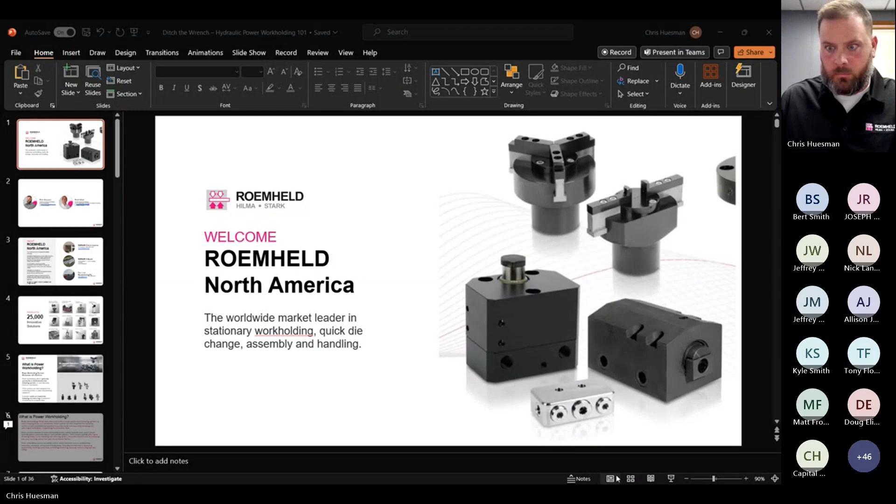With that, we have over 25,000 innovative solutions in our catalog, ranging from hydraulic cylinders, machining vices, zero-point clamping systems, assembly and handling, power units, all your necessary hydraulic components, pneumatic elements, magnetic clamping, die clamping, press-in devices, drive technology, as well as full system solutions.

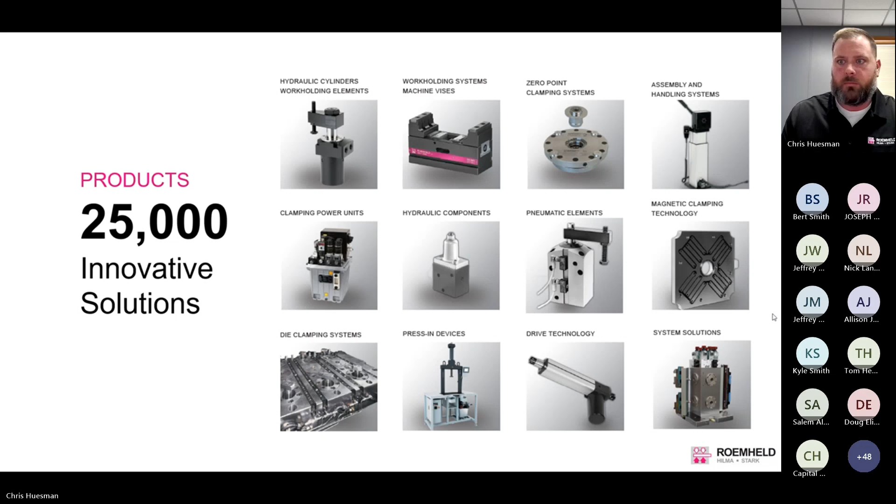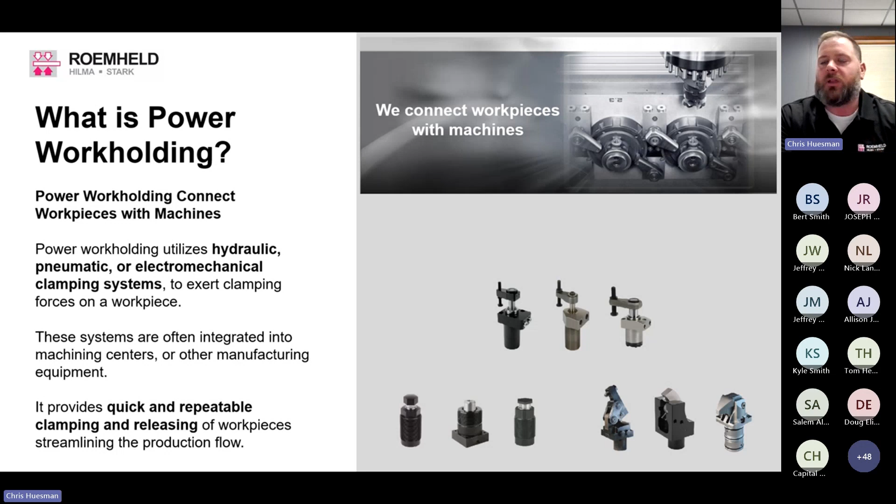So you may be wondering, what is power work holding? Power work holding utilizes hydraulic, pneumatic, or electromechanical clamping systems, typically to hold a part in a machining environment. These systems typically are integrated into a machining center or other manufacturing equipment. It provides quick and repeatable clamping for a robust manufacturing process, from manually loaded all the way up to highly advanced automated solutions. So what are the benefits of power work holding? Increasing productivity, enhanced precision, improved safety, and probably the most significant benefit is the time and cost savings.

So who should use power work holding? Do you want to make more parts with the same resources? Do you want to achieve greater repeatability and part quality? Are you looking to have fewer scrap parts? Are you seeing a shortage of skilled machine operators in your area? Are you looking to improve machine operator safety and ergonomics? If you answered yes to any of these questions, power work holding is something that you should explore.

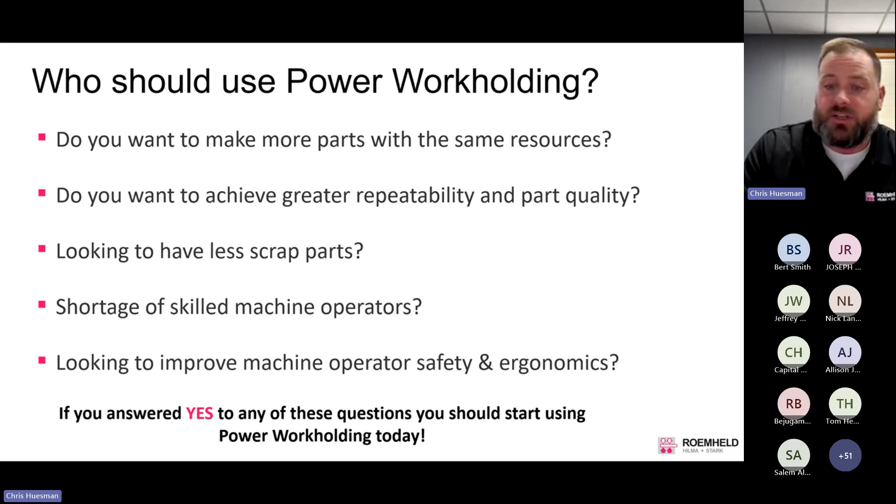So let's look at the first benefit, increasing productivity by ditching the wrench. It's quick and automated clamping and unclamping. This significant reduction in setup and changeover time minimizes idle time, maximizes spindle uptime, as well as assembly time, and allows you to put more parts through a machine, which saves you money. Power work holding systems can operate multiple clamps and other devices in sequence to accomplish a multi-step fixturing task, simplifying the process for the operator.

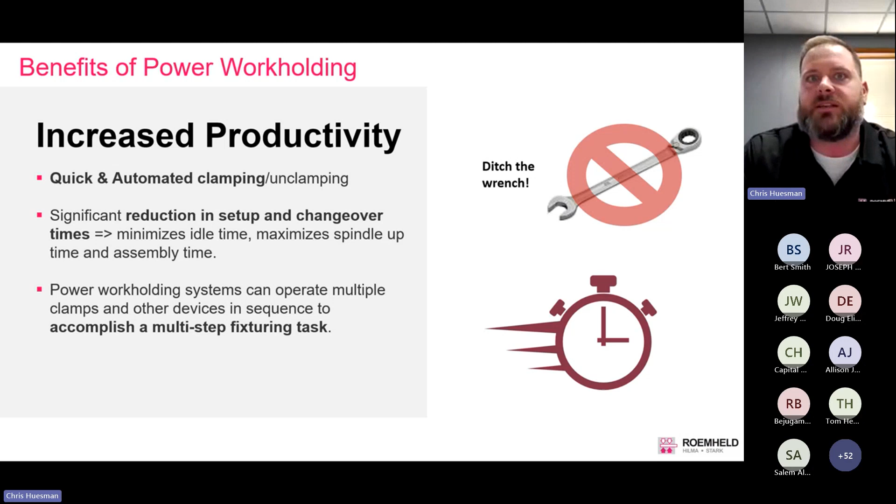Another benefit is enhanced precision. Consistent and repeatable clamping force ensures accurate and precise positioning of the workpiece. This helps maintain tight tolerances, resulting in higher quality finished products.

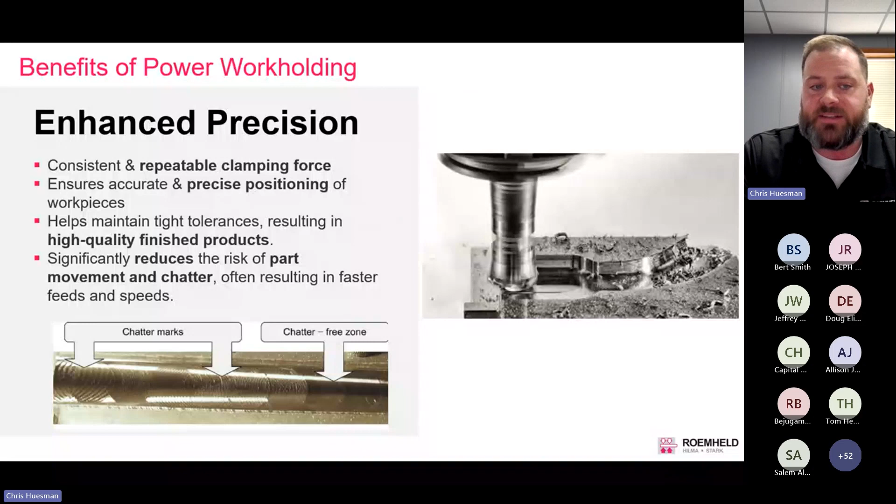Significantly reduces the risk of part movement or chatter, which can also result in the ability to push your tools faster. Improves safety: integrated safety features help prevent accidental release of workpieces and reduce the risk of operator injuries through check valves, interlocks, and various sensors. Eliminating manual clamping reduces operator fatigue injuries.

Power work holding also allows for remote control of inaccessible fixturing. So in a situation where you have features that are hard to reach for a standard operator, or a machine where you want the operator to be locked out, power work holding allows you to accomplish all these things remotely. Operator safety.

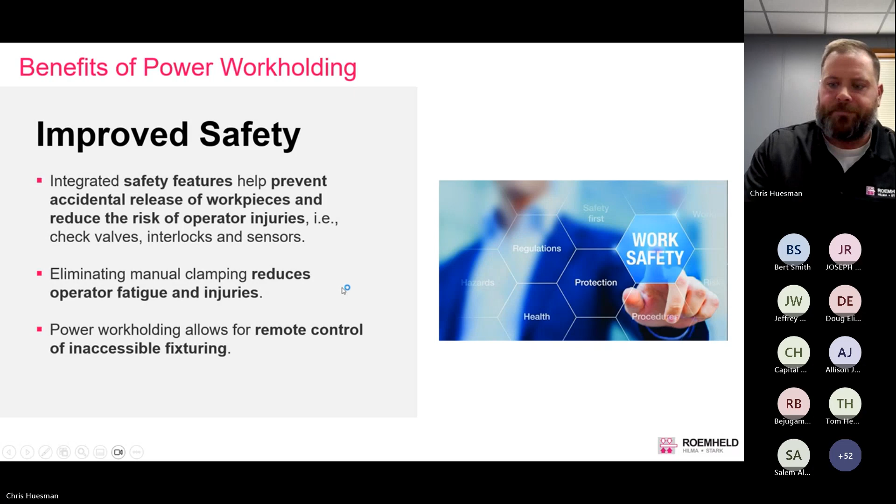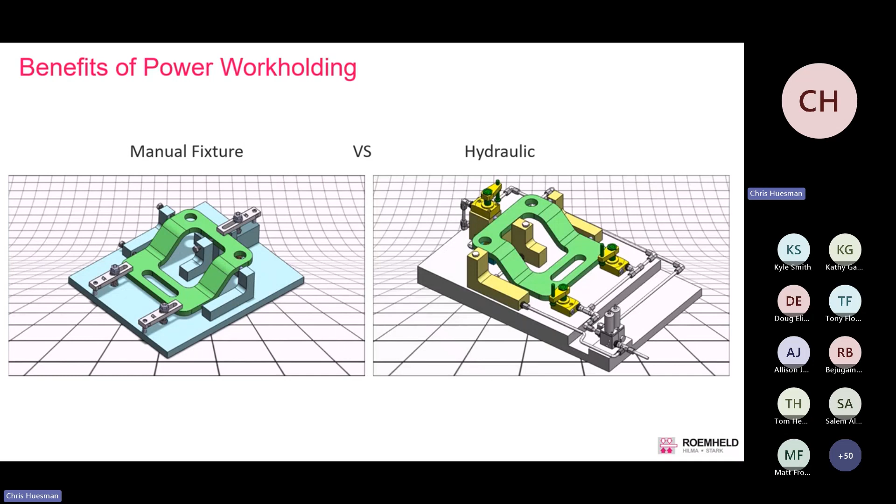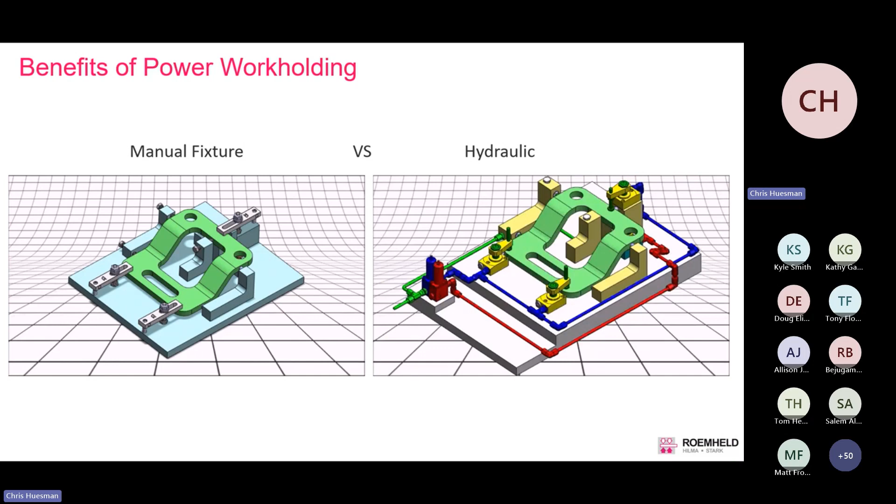Whereas moving into a hydraulic fixture, since everything is controlled from one point through sequence valves, we can automatically extend part crowding, clamping the part, and extending work supports in the proper sequence in a very short period of time. So that leads us to our time and cost savings. Reducing the dependency on manual labor saves significant time and reduces labor costs. The automation and quick setup capabilities ensure faster production cycles, resulting in higher throughput. So every minute that you save in clamping that part is a minute that you can be machining.

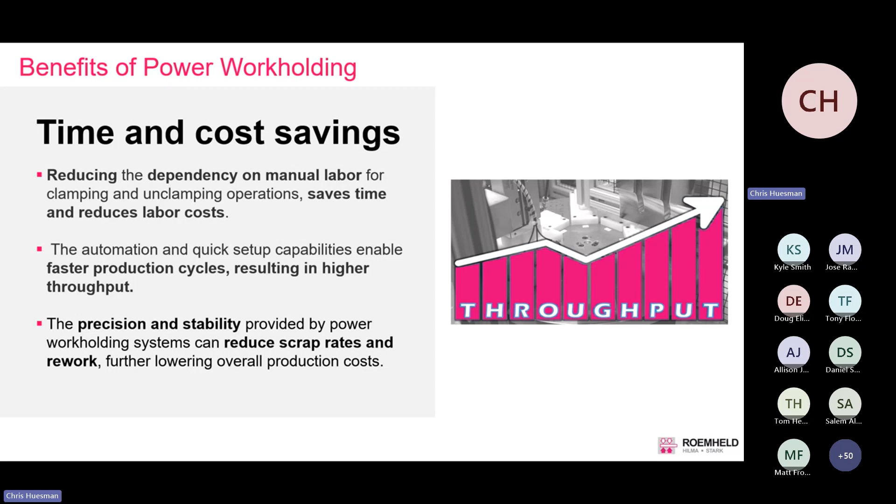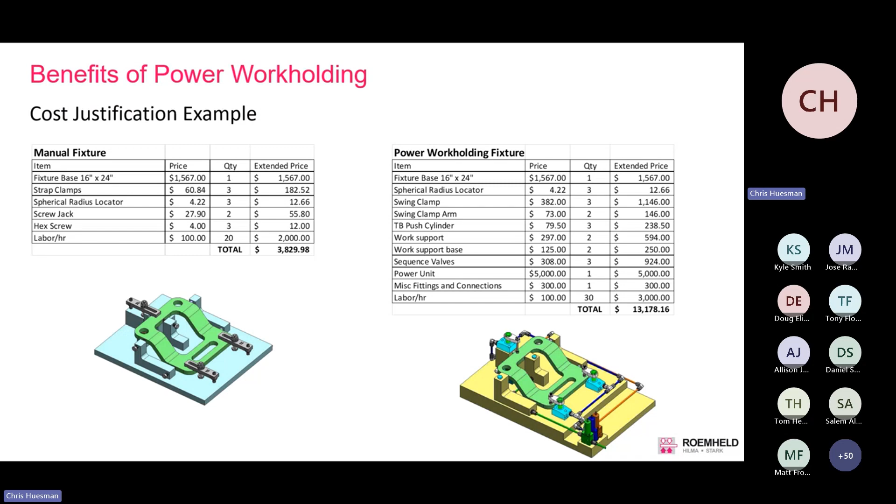It's very easy to show the return on the investment in moving to a system like this because it's such a significant time savings. The precision and stability provided by power work holding can reduce scrap rates and rework, further lowering overall production costs and increasing profits. So just a simple cost justification example showing the prior illustration with a manual fixture, an estimated cost to produce versus a simple power work holding fixture for the same part. The first thing that jumps out is the increase in price of around $10,000. But it's very easy to justify that through a simple calculation.

Most shops tend to know what hourly rate they want to make out of a machine. So as you break down through this list, you can see the total time to clamp the part versus the machining time, the total cycle time, the number of parts per cycle, and the machining rate per hour. Running through the math in this specific example, your return on investment purely in time savings, provided you have the volume of parts to take advantage of that, is very quick, roughly 2 weeks in this case. And we could provide this Excel calculator; comment in the chat if you'd like us to send it to you. Very easy way to run the numbers to see if it makes sense to move towards hydraulic work holding versus manual.

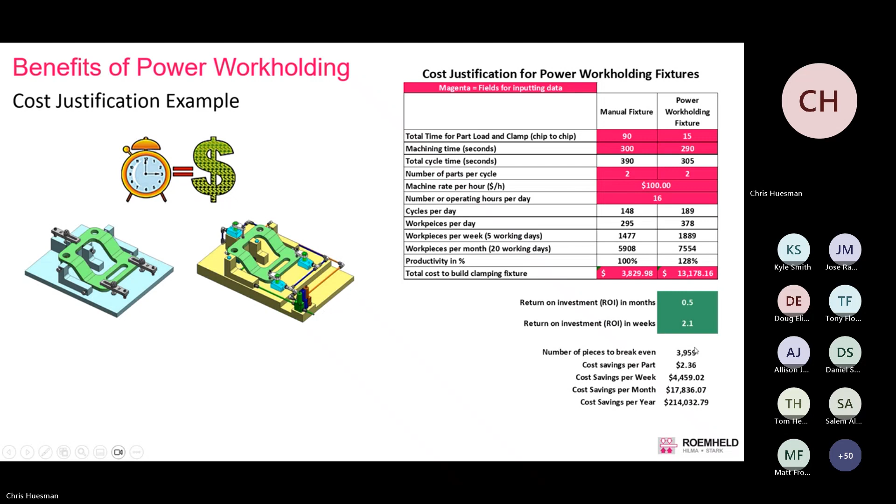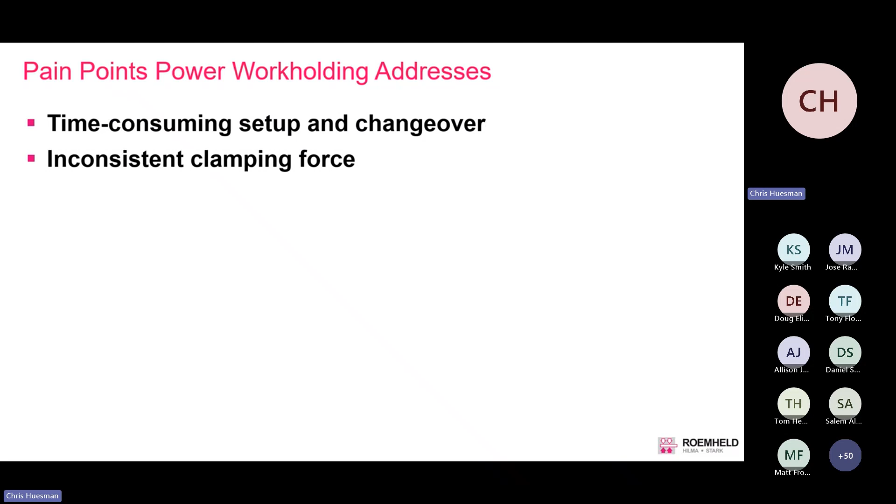So some of the pain points that power work holding addresses are time-consuming setup and changeover, and inconsistent clamping forces. When you're relying on an operator to tighten a bolt to the same torque every time, even with a torque wrench, there's a lot of variables that still come into play. Safety risks: if the operator doesn't properly clamp and the part is ejected from a fixture during machining, it can pose significant safety risks. Inefficient utilization of labor: if you can reduce the time a person needs to load the part, you can increase the time they have to perform quality inspections, deburring, or possibly even running a second machine.

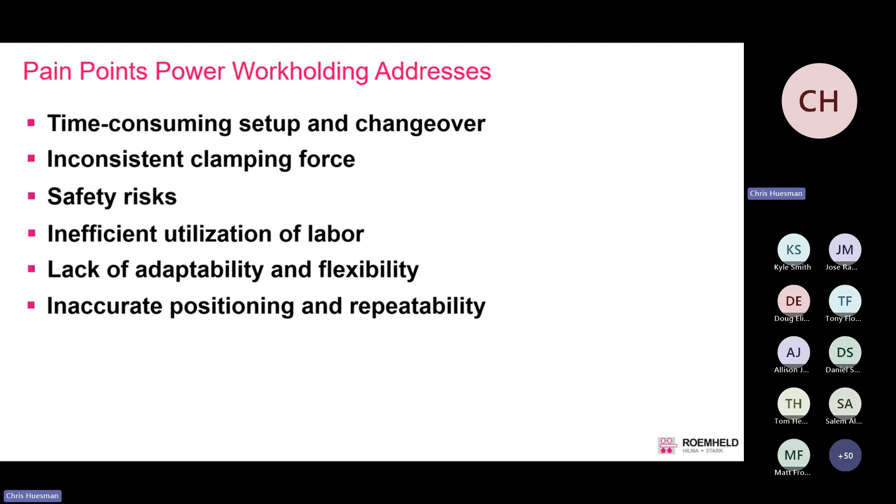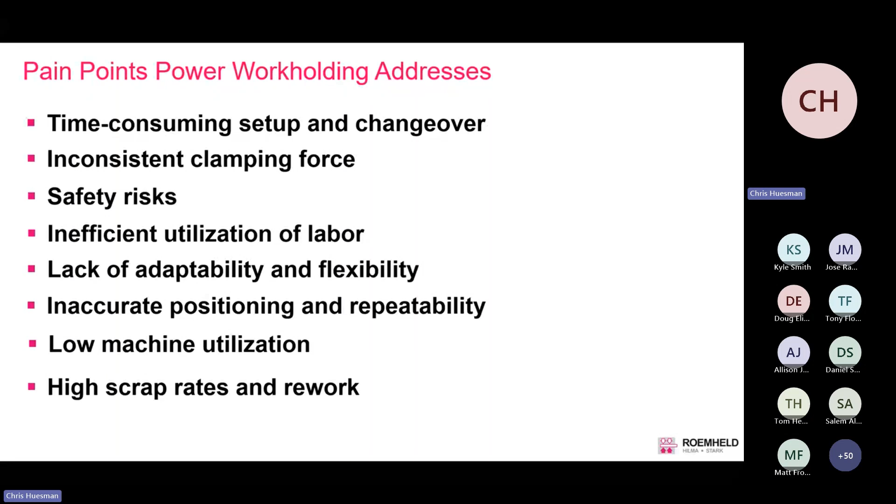Lack of adaptability and flexibility, inaccurate positioning and repeatability. When you're tightening with a hydraulic fixture, the cylinder goes to the same place every time. Improves low machine utilization, again, by increasing that spindle uptime. Reduces scrap rates and rework due to the consistency of the process.

So let's jump into some power workholding examples. These are some applications that we've been involved in. Most of these are very basic to give some good ideas of moving from a manual process into an introductory clamping situation using hydraulics.

So a very basic case here. The customer was literally using C-clamps to hold the parts in a secondary operation and some strap clamps on the top. The manual tightening took a significant amount of time. It relied on an operator that could work through this process consistently. And it was taking the operator roughly 2 minutes to swap parts out.

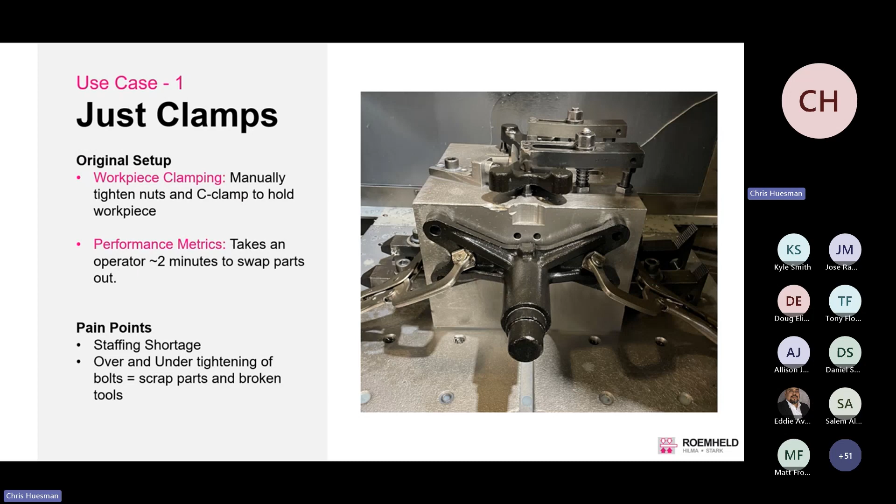This customer was having issues finding qualified help, finding operators that would use a torque wrench and not over or under tighten the parts. And they wanted to reutilize that existing base fixture or the tool block. So we were able to throw together a quick concept for them using their same setup, using a very simple double acting hydraulic swing clamp.

Now it takes the operator less than a minute to swap the parts out. They get consistent clamping force, so no scrap due to over or under tightening of the bolts. So they've increased their throughput and overall increased profitability by making more parts, better parts.

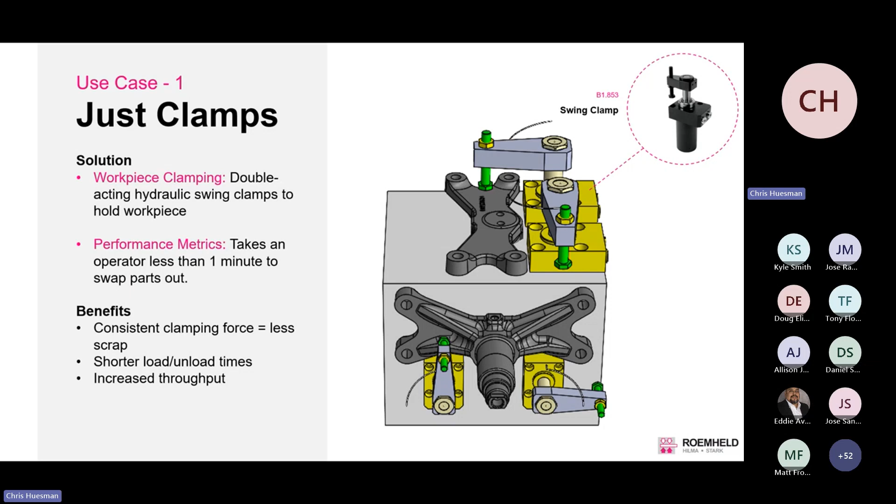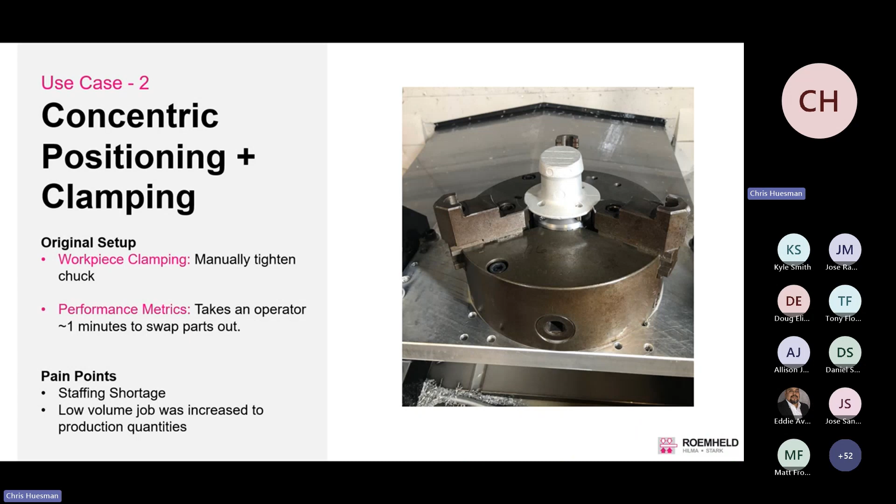Use case number 2, it utilizes some concentric positioning and clamping. So with this part, the customer had prototyped and done the low volume job using just essentially a scroll chuck. Manually tightening, it took the operator approximately a minute to swap parts out. This is one where they were having staffing shortages, and this job was getting ready to increase to production volumes, and then it wasn't going to fill the need in increasing the throughput.

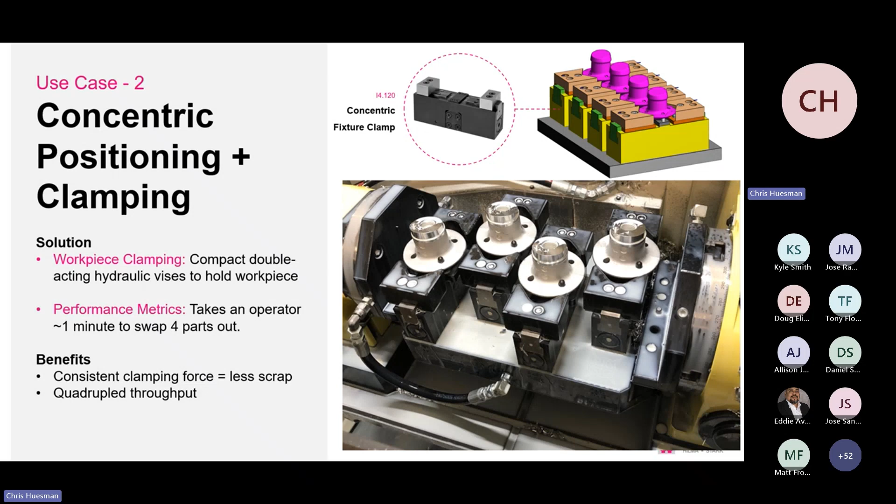So this is another example using our flat lever clamps. So the customer was bidding a new high volume job. So we were able to look at this before the job started. They were having staffing shortages, so they wanted to automate this cell as soon as it came to the plant. So our solution for the workpiece clamping was to use our double acting flat lever clamps. These have integrated position monitoring of the clamp arm.

So this is tied into the automation system so that as a safety feature before the robot comes in to grab the part, there's verification that the clamps are out of the way. Also verification that the clamps are clamped over the part before the machining cycle starts. This makes for a robust process that's suitable for lights out automated machining. Again, consistent clamp force equals less scrap, shorter load and unload times, and increased throughput.

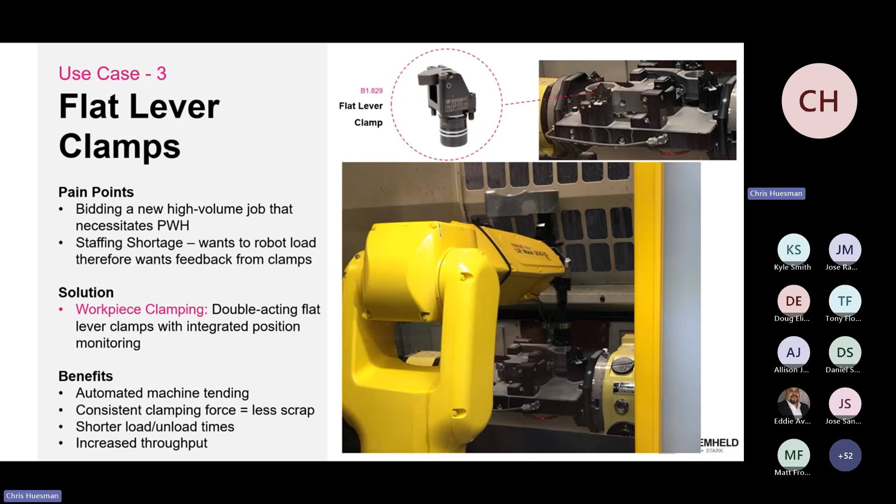In another use case, the customer had a very small part that we needed to get creative on how we clamped this. It was a high volume job, so they wanted to be able to robotically load it. So they needed feedback that the part was present. And a very tight tolerance dictated this part be machined in one setup. So we used our double acting bore clamps with a custom neck length and a custom position of the air seat detection to ensure the part is loaded correctly.

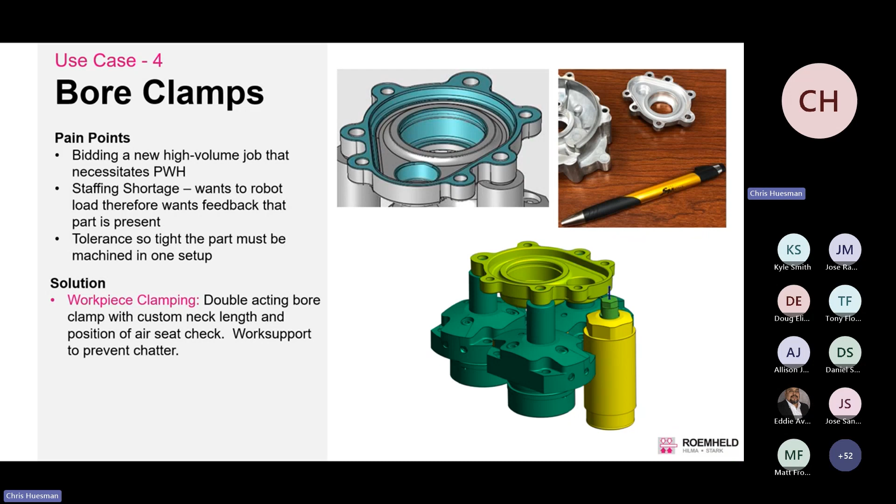And then we added a work support to help prevent chatter. But this setup allows to clamp within the precast bore holes, bite in and then pull down into the datum surface. So all the machined features are accomplished in one setup. This was then put into a production environment where they're able to put 4 on a fixture. And this has been a very successful project for the customer.

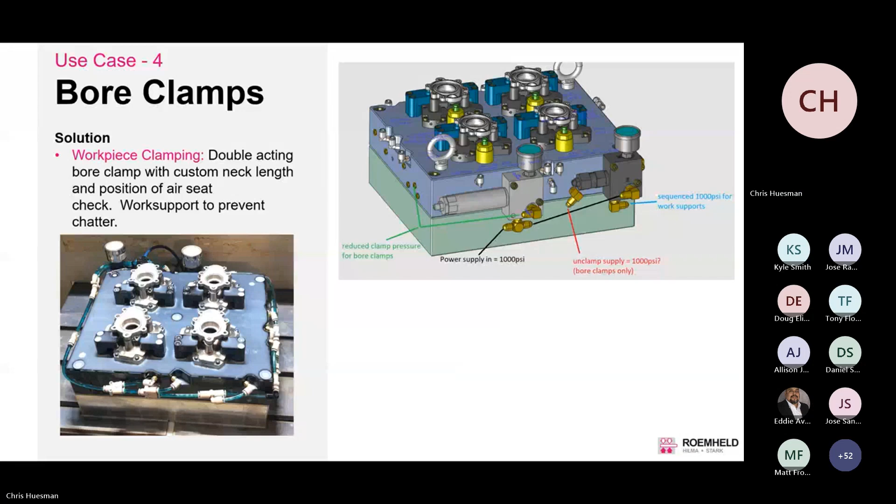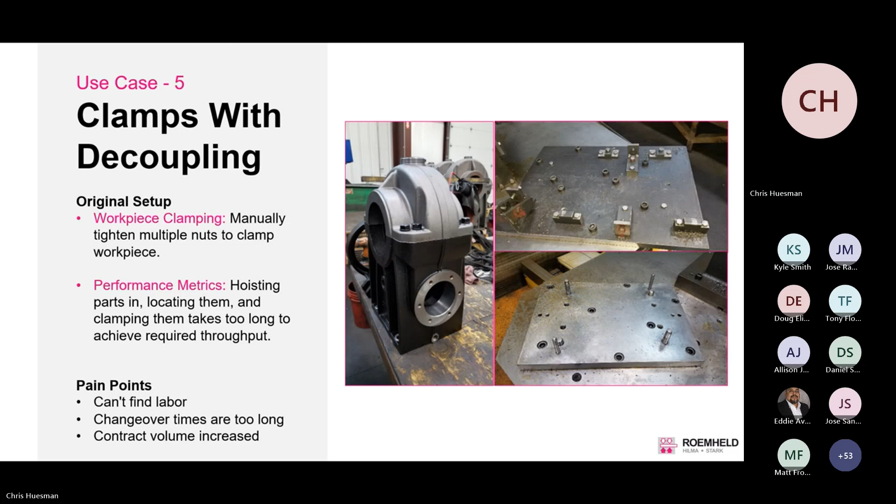Another example of a more simple fixture using a decoupled pallet, where we're not keeping the hydraulic pump connected at all times. In this case, the customer is manually tightening multiple nuts to clamp the workpiece. Hoisting the parts in place, locating them and clamping them was taking too long to achieve the amount of parts that they needed to make. They were having troubles finding labor, changeover times were too long, and the contract volume was set to increase.

So we came up with a simple solution using our double acting hydraulic hinge clamps to hold the workpiece. We located on pins, round and diamond, and roughly a 7-second clamping time. Utilized a pallet decoupler for easy connection to the fixture in the load position.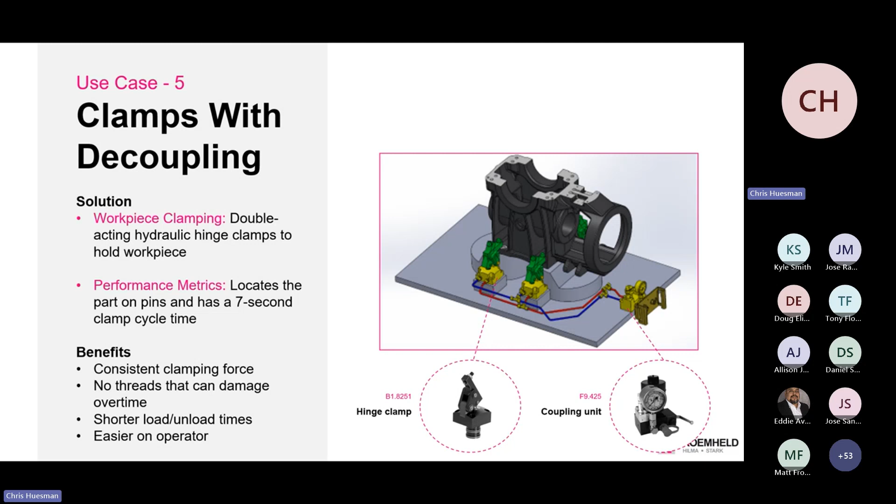And the benefits of the system included consistent clamping force, no threads for the manual clamps being damaged over time, shorter load and unload times, and it was easier for the operator. Since this was a large part, it was difficult to reach over the part to clamp one side or the other.

In another use case here, we see a piston rod being manufactured. The customer had won the job and was using manual clamping at the lower volume, tightening the bolts with an Allen wrench, manually locating the 2 workpieces with a screw and a clamp with 2 bolts.

This was his highest production volume job that had gone up in volume, and had a shortage of qualified labor, so he wanted to design a system that would allow him to machine tend this with a robot in the future.

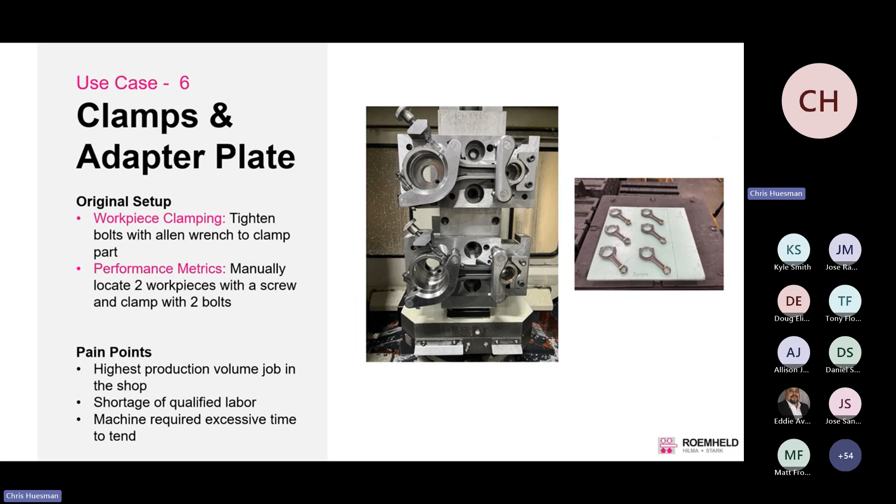I apologize. It looks like the slide is missing for our solution. When we send this presentation out, we will be sure to include that.

In an additional use case here, the customer had a leak testing application for a very large cast oil pan. It was very important that the operator tightened those bolts in a proper sequence to ensure that it sealed against the rubber flange before it went to a dunk tank for leak testing.

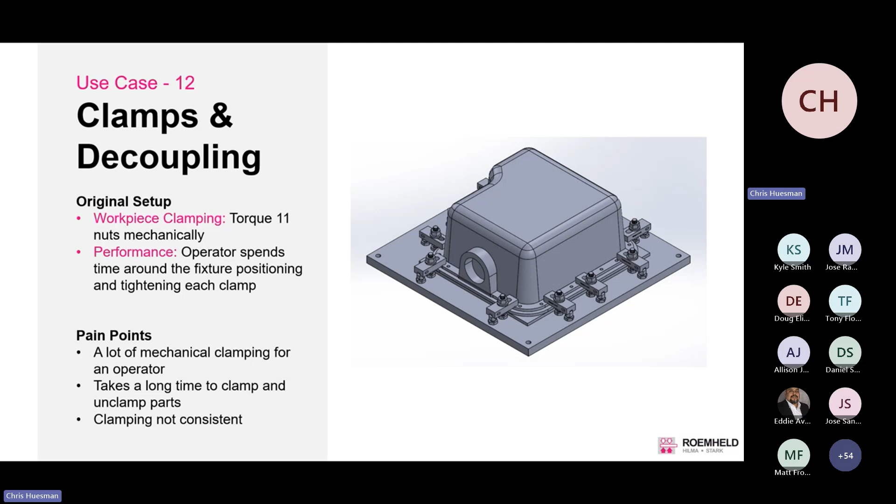So the pain points, again, were a lot of mechanical clamping. It took a very long amount of time, and it was very easy to get an incorrect test if the clamps were tightened in the wrong sequence and a good seal was not made with the rubber.

Oh, okay, I'm sorry. This is the actual application for that prior one. As you can see, we designed a simple fixture utilizing his existing tombstone and just adding fixture subplates, our flat lever clamps. We designed it to be decoupled if needed. And with the flat lever clamp having clamp position monitoring, it enabled him to have the option to automate machine tending in the future.

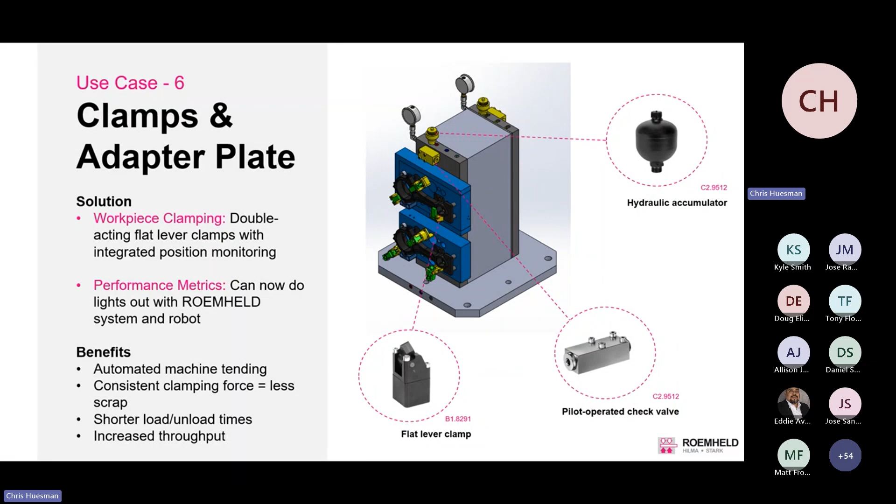So our solution to that leak testing application was to go with a hydraulic swing or link clamp. This enabled the clamping to all be done simultaneously, ensuring that the part was pulled down into the sealing surface equally at the same time. Using a decoupler, this was able to be loaded at a load station and then moved into a dunk tank as a self-contained unit.

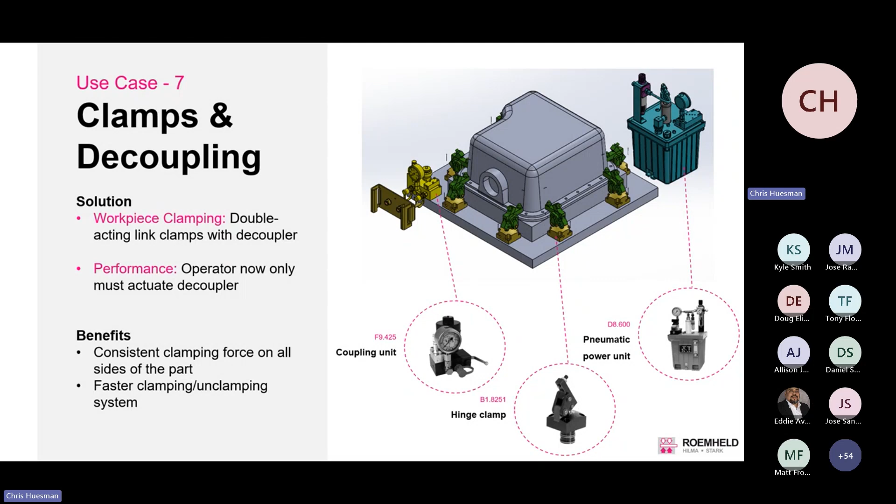So I hope that gives you a good overview of some introductory applications where you can use power work holding in a simple application that can then lead to, ideally, more advanced solutions in the future. I believe we have some user submitted questions after this. We will quickly roll through those and then open the floor up for any additional questions you might have.

So generally, how long does it take to deliver a large fixture? So with our robust quick ship line in stock, ready to ship from St. Louis, a turnkey fixture from a builder that we work with can take anywhere from 6 to 12 weeks, sometimes longer, depending on complexity of the fixture, also quantity.

Do we have any pneumatic or only hydraulic? Primarily, most of our product is hydraulic. We do have a couple of options in pneumatic, specifically swing clamps. We also have electromechanical swing clamps and some mechanical work holding options. But primarily, our core product and our core focus is hydraulic work holding.

Do we sell hydraulic pumps and pneumatic pumps? I'm assuming electric hydraulic pumps or air over oil pumps. Yes, we do. We have a host of options that are built in Germany. We also have 4 different styles of pumps that are assembled in St. Louis that we stock all the components for.

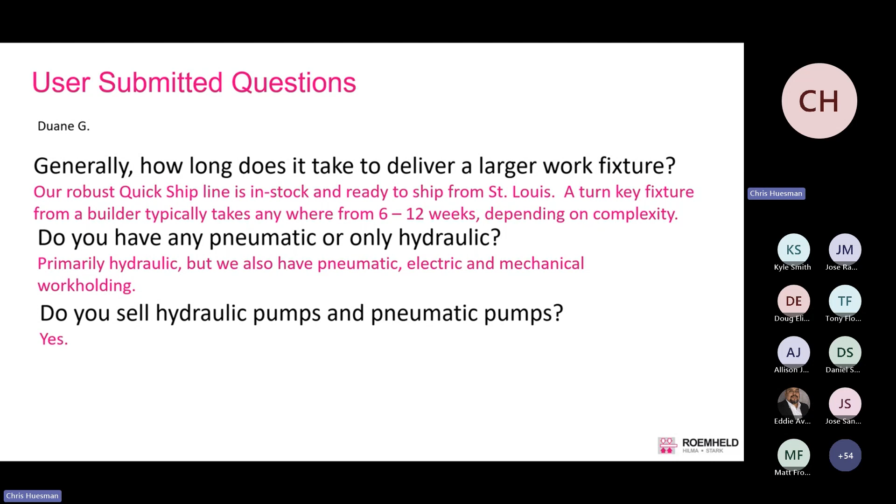Essentially, we talk to you about your application to see what your needs are, and then we assemble or configure that pump specific to your needs at a very competitive price and a very quick lead time because we stock everything in St. Louis.

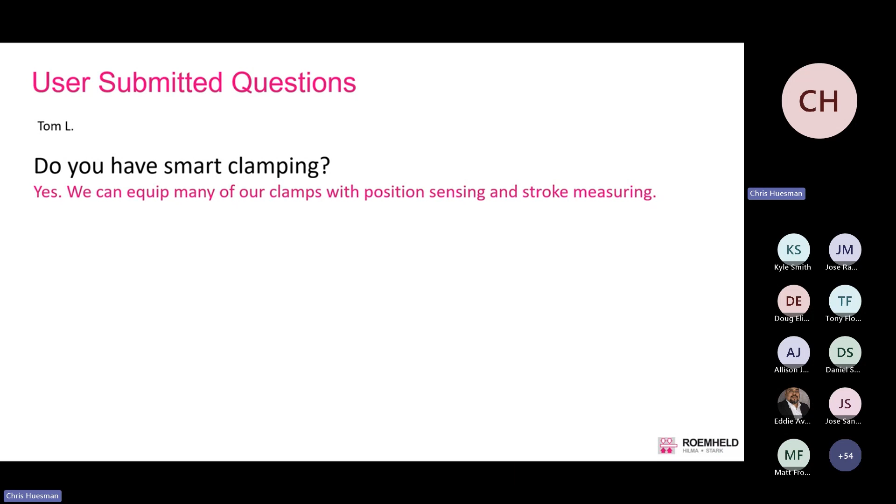How do I find a qualified local fixture builder? Please just contact us offline to take a look at your application. We work with many builders, and we can always direct you to somebody that's either local to you or fits your needs, whether it's a lead time need or an application that better suits one builder or the other. So absolutely, please reach out to us, and we will connect you with somebody in our network that can definitely take care of you.

Space requirements. So again, this is something that really depends on the product you're looking at. But I will say that we at Roemheld have some of the most compact clamping elements on the market. With our high pressure items, we have some very unique designs that allow for a very small footprint with a very high amount of clamping capacity.

Our concentric fixture clamp operates kind of like a hydraulic vise, except it's very small. So for those small part applications, that's a good compact item. But we also have clamps that go up as big as you could possibly need. So that question really depends on your application. So please reach out if you have a specific application in mind, and we can take a look at it.

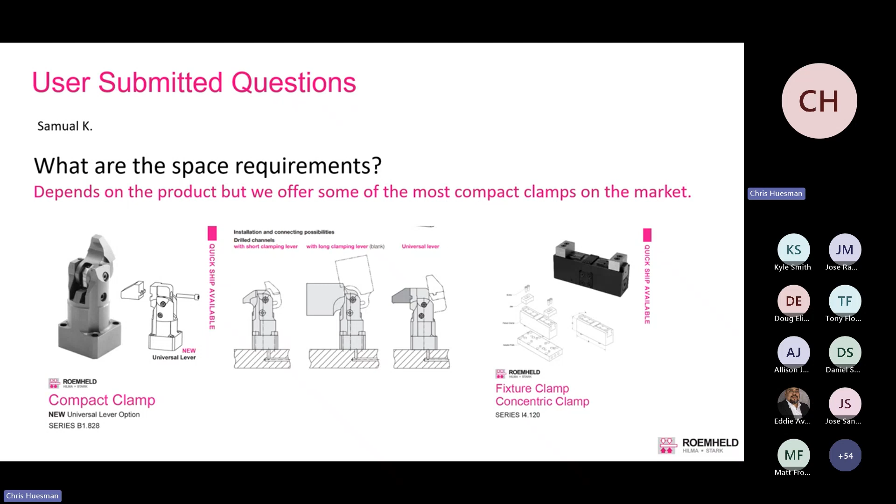I use vises, manual vises, and I was wondering if Roemheld had something for doing plate specifically that I could configure on a T-slot table. I'm confident we would definitely have a solution. Let's talk further offline so I can get a better idea of what your actual application is. But we have a full line of vises ranging from manual up through hydraulic. There's a lot of different solutions we could look at. It sounds like maybe large plate machining.

Yeah, high mix, low volume. Yeah, absolutely. Let's connect after this, and I can get a better idea of what type of products you're looking at or that you machine, and make a recommendation. Thank you.